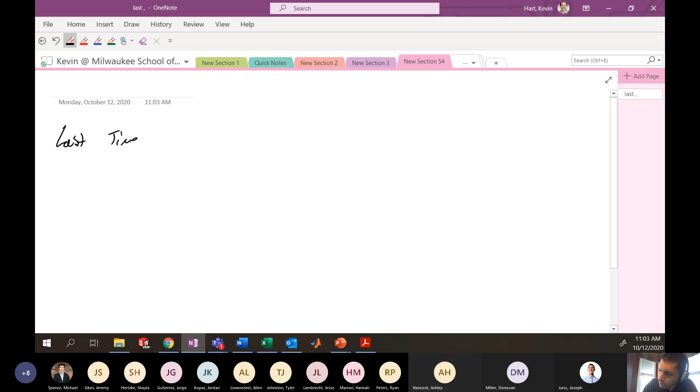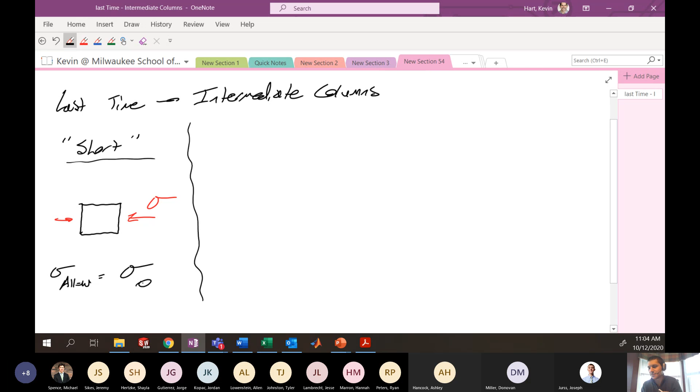So last time we talked about intermediate columns. The idea here is that you could think of columns in a variety of different categories, but if you thought about columns as short, then you might have something that looks like this. And if you're loading it axially with some stress sigma, then the allowable stress you might consider is just the yield stress sigma 0, if a bar is particularly short - this would be for small slenderness ratios.

On the other extreme, you might think of a long bar, like a long column. That might look something like this, where we load here with some stress. And our allowable load here at failure is that of buckling, which we call sigma critical, our buckling stress to failure. We saw that this was pi squared E over the slenderness ratio, which is L on R squared.

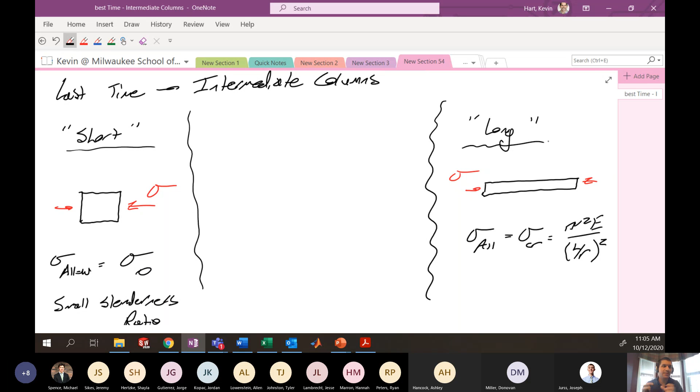Then the question I posed in the lecture last time is: what happens if you have something in the middle? What do we consider long? What do we consider short? And how do we delineate a long column versus a short column? So here we have what we call the intermediate range.

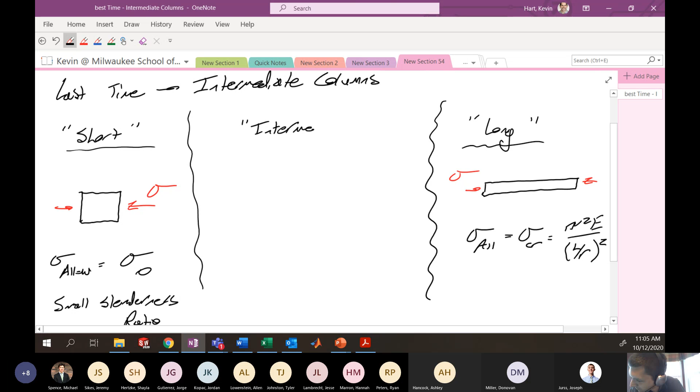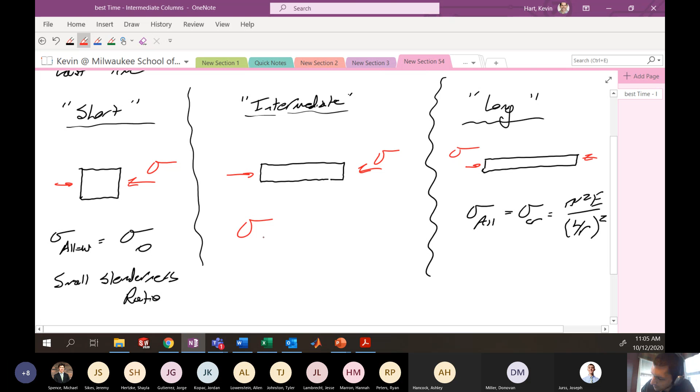The idea here is that maybe it's somewhere in the middle, in between. We're going to load this with some stress here, just like the other two situations. The question is, what is the allowable stress? Is it the yield stress? Is it the buckling stress? Is it something else? That's what we tackled last time.

So this is sort of this intermediate slenderness ratio idea. Here this is large slenderness. If it's very, very slender, it's going to just buckle like we've talked about before. And this is sort of middle slenderness.

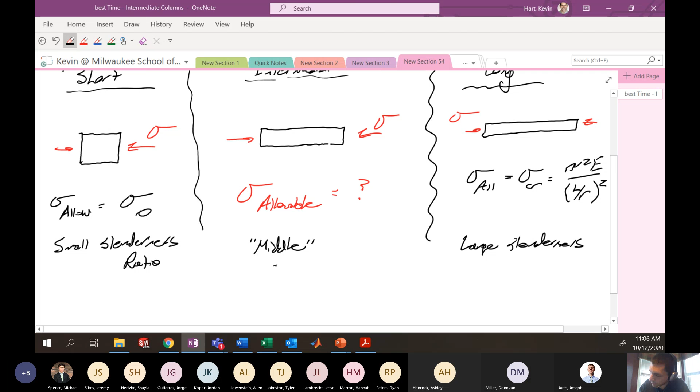Kind of how I feel after eating too many pizzas these days.

Middle slenderness. Okay, so the idea is you might want to plot slenderness ratio and look at what the stress at failure is given various slenderness ratios. If the slenderness ratio is very small, then you're going to fail by yielding. If the slenderness ratio is very large, you're going to fail by this buckling we've talked about before. And if it's in the middle, what happens? Well, let's talk about that.

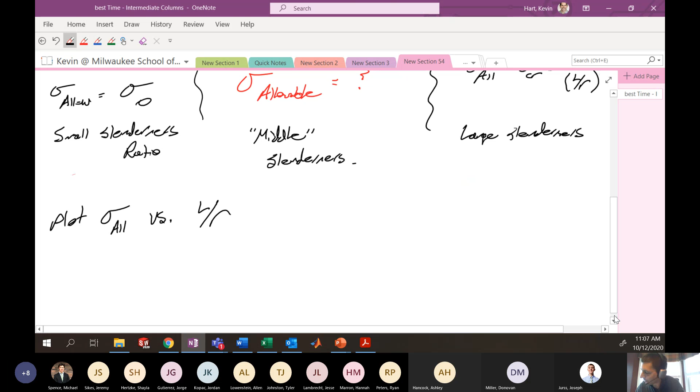So if we plot your allowable stress, we might call it sigma allowable versus slenderness ratio, just like L on R. Then you might see something that looks like this, where you have the slenderness ratio L over R on the x-axis, and you have the allowable stress on the y-axis.

Now we know at very small slenderness ratios, we just have these short blocks that are going to fail by your typical yielding, which you traditionally think of as the yield stress of the material. So here we have the yield stress sigma 0. This might be like the failure line that dictates failure for small slenderness ratios.

You might also have a situation where your slenderness ratio is very large and you're going to fail by this Eulerian buckling theory, that has some sort of curve that looks a little bit like this, where we know the equation that dictates this is pi squared E over the slenderness ratio L on R squared. So we see that this particular line has like a 1 over x squared sort of look to it.

So in an ideal world, your dictation of how these particular materials would fail can be governed by the slenderness ratio, by looking at what would be the minimum stress to failure in each one of these situations. And this would be the ideal case. Let's call it the ideal fail line.

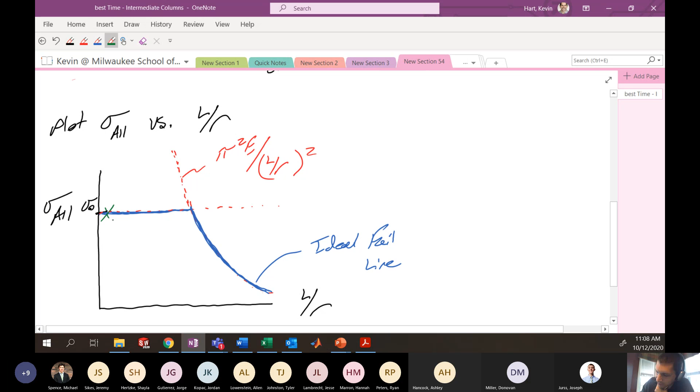But in reality, people have done experiments where they've looked at testing columns of various lengths, and you see that in reality, data actually looks something more like this. If we wanted to put a trend line to this, it would look something a little bit more like that. Okay, so this is reality.

It's the next reality TV show. Intermediate buckling.

So we see on the far left, where the slenderness ratios are small, we do sort of adhere to that very short slenderness, or this compression block range. So we would call this the compression range. This area down here is the compression range.

And then way out here on the right-hand side, where reality again lines up with our Eulerian buckling theory, we say that this is the Eulerian range or the slender range. But all these slenderness ratios that exist in this range here, where the data in reality doesn't actually line up with what you might predict, we would call this the intermediate range. And that's the interesting range for us.

So this is all still kind of review from last lecture. This intermediate range here varies by material.

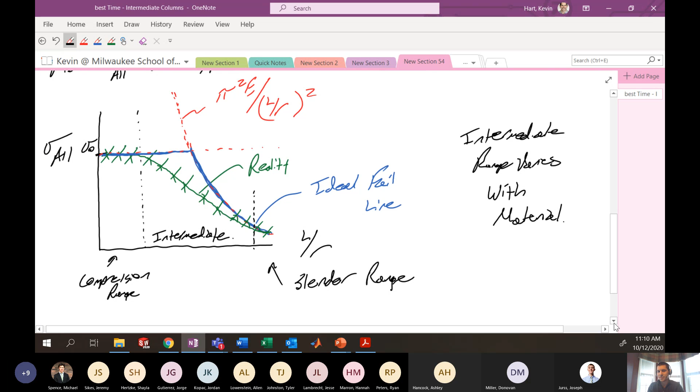So some examples I pulled up from the lecture last time. If you watched the video, you saw me pull in some examples of actual failure curves for a variety of different materials. I'll go through maybe one or two right now so you see.

Here is an example of one for aluminum.

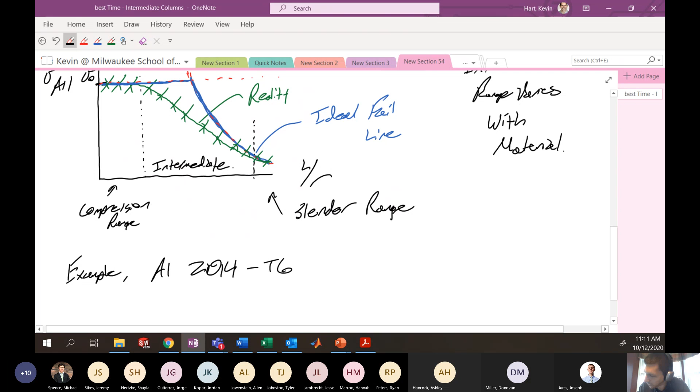So here's an example. This is aluminum 2014. Boy, I wish I could go back to 2014. No, I don't, because I'd still be in grad school and not enjoying my life as much.

All right, so here's an example for aluminum 2014 T6. Whoa, why did you go there? Go here. What? All right, let's just put them over here. There, okay.

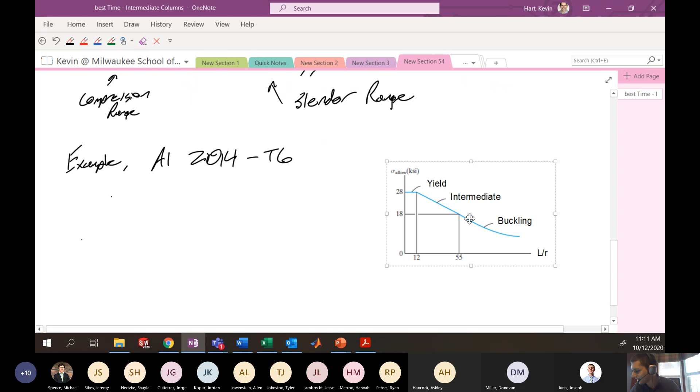So there's an example for aluminum 2014 temper 6. The idea is that down at this end, where your slenderness ratio is 12 or less, you're going to have this yielding, short block kind of compression type failure. If your slenderness ratio is greater than 55, you're going to have slender buckling, which is pi squared E over L over R squared, your typical Eulerian buckling equation. Then you have this intermediate range here that doesn't really follow either one of those particular lines.

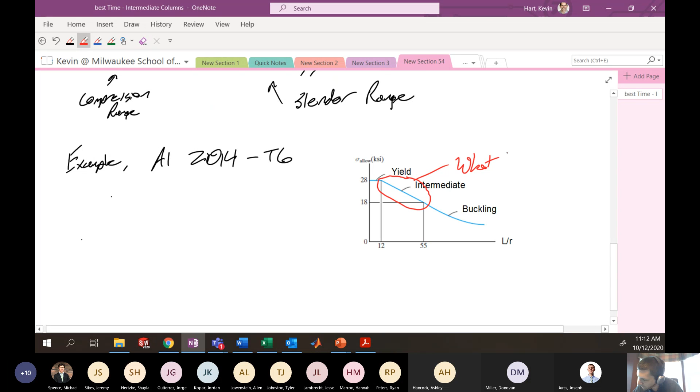And so there's this trend line that exists, that people have come up with utilizing real data, that we now use as sort of gospel for this particular material. Again, this is specific for aluminum 2014 T6. They vary by material. So the question is, what is the equation that governs this particular portion of the curve? What is the equation that governs that line?

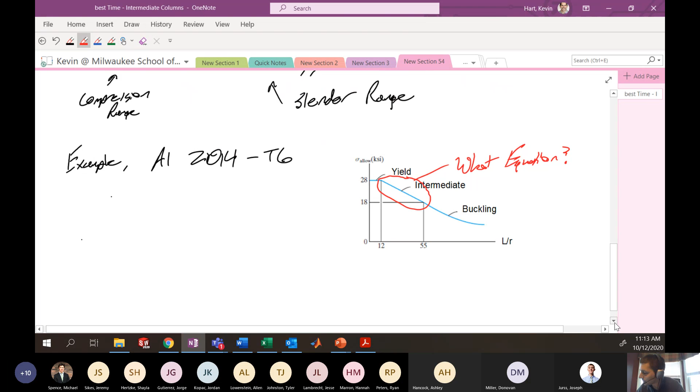Depending on the material you're looking at, the equation that governs that line is going to be different. So you more or less have to populate a chart that tells you all of the equations for all of the materials. Your Riley book has an example of a couple of probably the most relevant materials, and I'll go through that here now. This comes from your book - this is table 9-1.

If you take a look at this chart, it shows 4 materials of interest, even though there are many, many more codes like this that exist. So let's take a look at this first one, code number 1. This is for a structural steel with yield point sigma Y - whatever structural steel you want to consider.

In this situation, we have your typical Eulerian looking equation if you're very slender. So the slender range is on the right-hand side. This tells us that if you're slender, your equation for failure is governed by this particular expression: pi squared E over 1.92 times slenderness ratio squared. Kind of a strange expression, but that's what it is.

We're dictating where the slenderness range is by this particular domain distinction. Here we're saying that if L over R is greater than this C value, you're in the slender range. So what is that C value? Well, that C value depends on the yield strength of your material - I'll blow this up a little bit, but this here is 2 pi squared E over sigma yield. This is a distinction telling you what is the actual slenderness ratio for moving from the intermediate to the slender range - this governing value. It's an indication of what you might need to use to determine whether you're slender or intermediate.

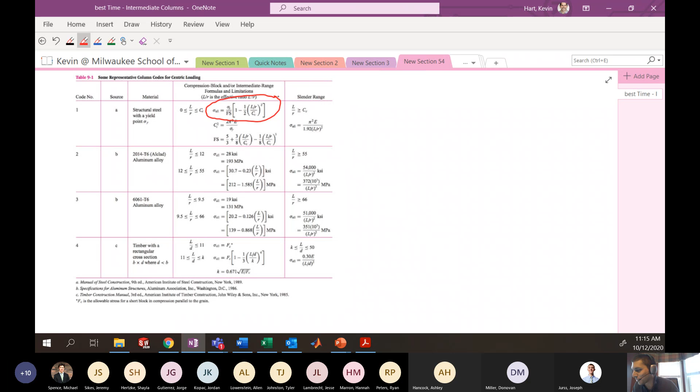Now, if you're less than that C value - so if you're between 0 and that critical value given by capital C - you're going to use this equation here. That's this crazy equation that dictates the intermediate range for this particular material: sigma y over Fs, multiplied by 1 minus 1/2 times slenderness ratio divided by C squared. It's this kind of crazy equation where Fs is given by this particular expression. A lot of randomness to these equations, but if you just follow this chart, it can get you where you need to go.

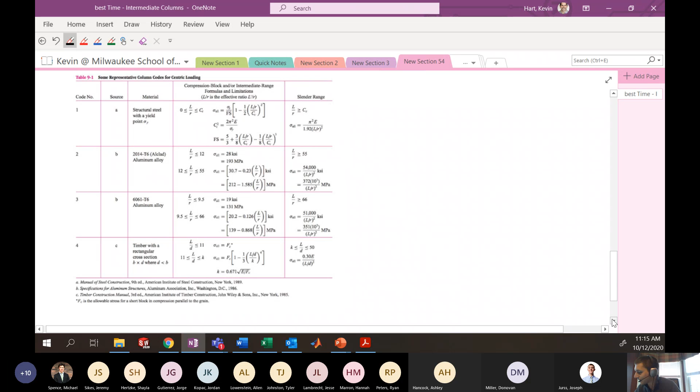So that's about where we left off last lecture. I just wanted to do a quick recap in case someone hadn't watched it, and we'll do now an example problem where we're actually going to use this chart to figure out a problem.

So here's an example from your lecture notes. I'll pull this up quickly for you to copy down, and we're going to look at a Douglas fir timber column. Douglas fir is a common material used in housing construction, and we'll look at this particular situation where we're loading up a long, slender timber column.

Tinder column - gosh, let's swipe right on our Tinder column. Okay, no, timber column, and we'll take a look at how this guy fails.

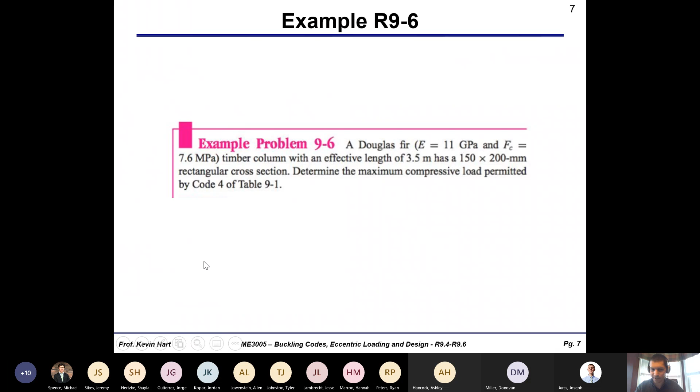But here's the problem we're going to work on. We're given the modulus of the material, and we're given this FC value, which is the maximum compression load required to work in Table 9-1 that we have before. It has an effective length of 3.5 meters. Effective length means it's already accounting for the boundary conditions, so we don't really have to worry about boundary conditions here. We're told the effective length is 3.5 meters, and we're told some information about the cross section. Let's draw this cross section quickly so we get an idea of what we're working with.

So this cross section maybe looks something like this. This guy is 150 by 200 millimeters. So maybe we'll call this 150 millimeters, and this is 200 millimeters. We want to determine the maximum compressive load permitted by this particular code.

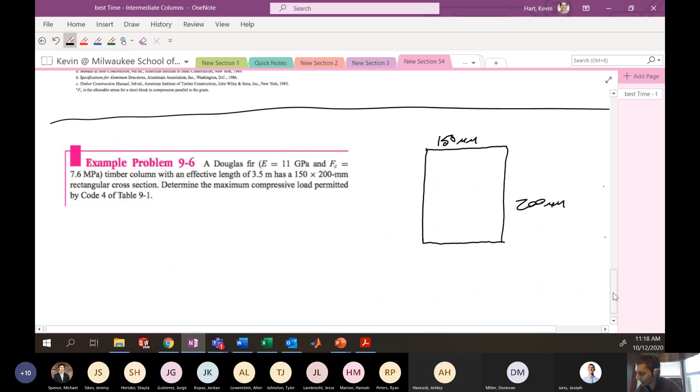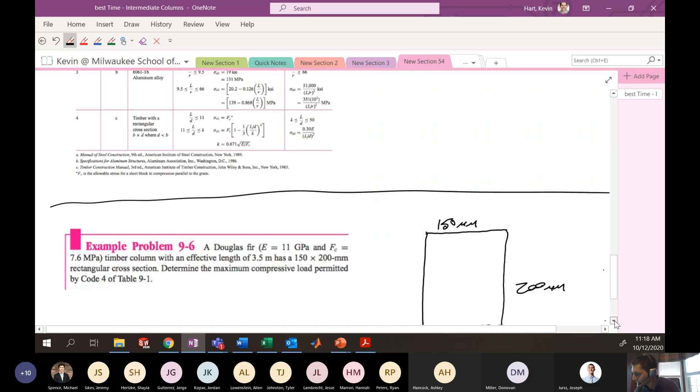All right, so we want to take a look at this code first, and we're specifically looking at Douglas fir. Let's go back up to this chart here, and we'll take a look at the Douglas fir portion. Maybe I'll bring in my PowerPoint slides so we can zoom in on that area. Let's bring in the notes here. By the way, this table, if you didn't notice, was in your notes.

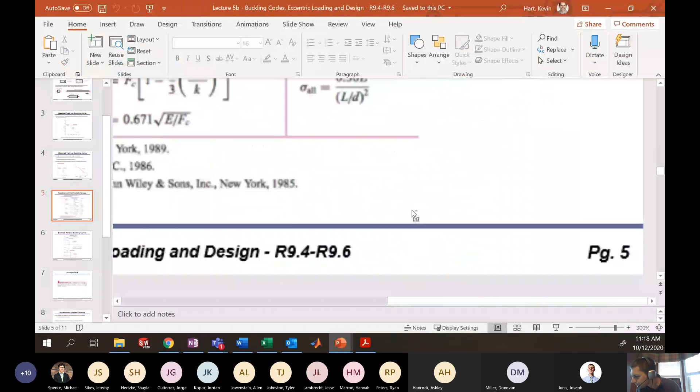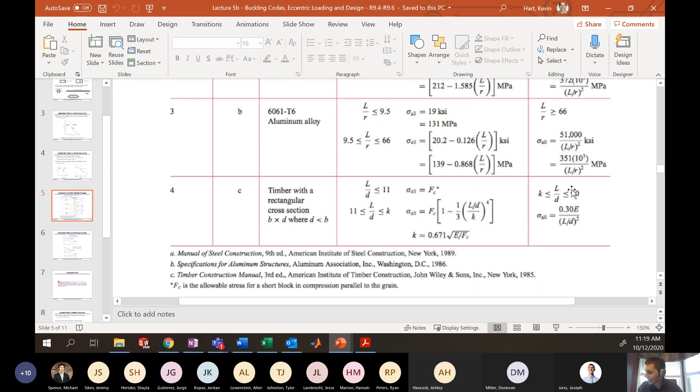And let's take a look at this guy here, specifically the Douglas fir portion, down at the bottom. So we have a timber with a rectangular cross section B by D, where D is less than B. This will be important in just a second. We have information here about how we distinguish the various regions. If L on D is less than 11, the allowable stress is just this FC value. If we're between 11 and K, our allowable stress is dictated by this equation, where K is calculated with this particular value. And if we're between K and 50, our allowable stress is given by this other equation. So let's go back over to our problem statement here.

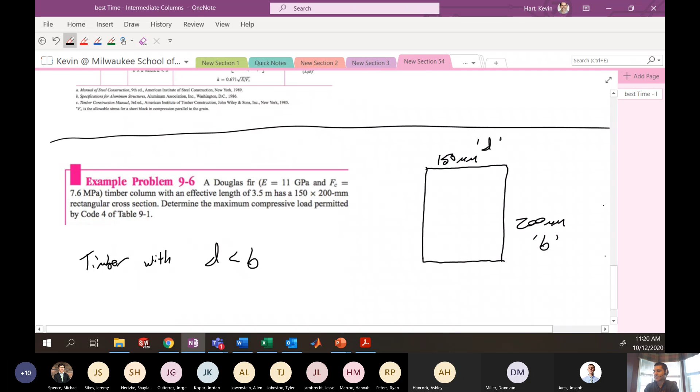We're told that the timber has a rectangular cross-section B by D, where D is greater than B... sorry, B greater than D. So here, this 200 millimeters would be our B variable, and this 150 millimeters would be our D variable. Hopefully we understand that, because D has to be less than B in a rectangular cross-section.

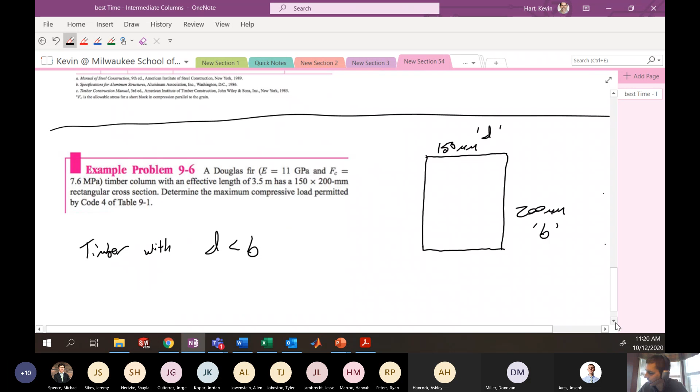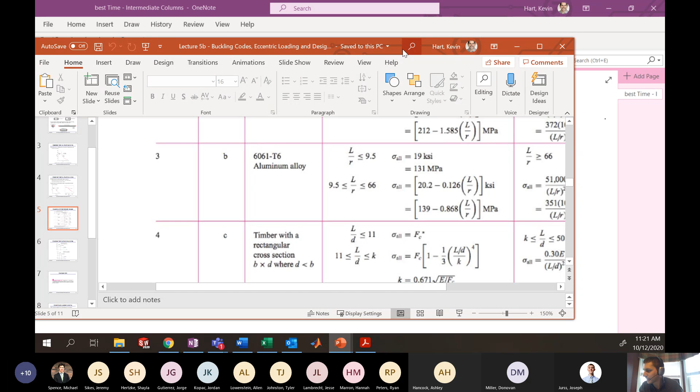All right, so with that chart, we saw that if our effective length over D—remember, we're working with D for this particular chart, the one side length of the cross-section B by D—is less than or equal to 11, we fail by compressive stress, and the allowable stress is just this FC value.

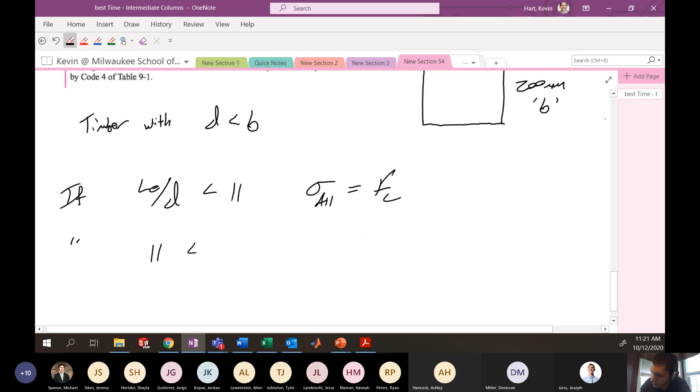If LE on D is between 11 and K, then our allowable stress is given by this other kind of crazy equation—I won't write it down here, but we'll revisit it later. And if K is less than or equal to LE on D, which is less than or equal to 50, also part of the chart, then your allowable stress is given by yet another equation in that chart.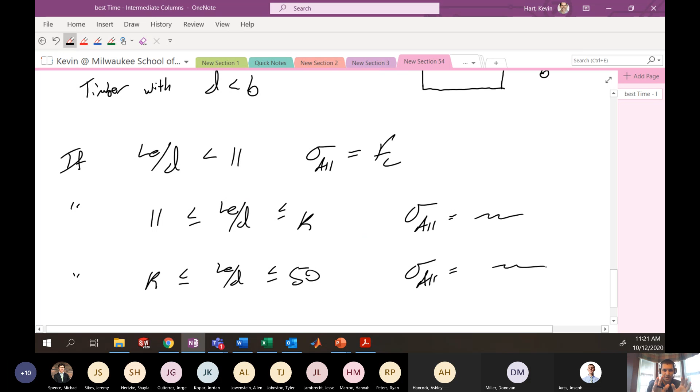So to work this problem, we're going to need to calculate this L on D value, and we also need to calculate this K value so we know how to delineate between the intermediate and the slender regions. So let's get on with that.

So here, L on D: we're told the effective length of this column is 3.5 meters. So here's 3.5 meters divided by the variable D, which is the shorter portion of the cross section—0.15 meters. I'm going to work in meters instead of millimeters. This gives me an effective length ratio I need for this problem, which is 23.3.

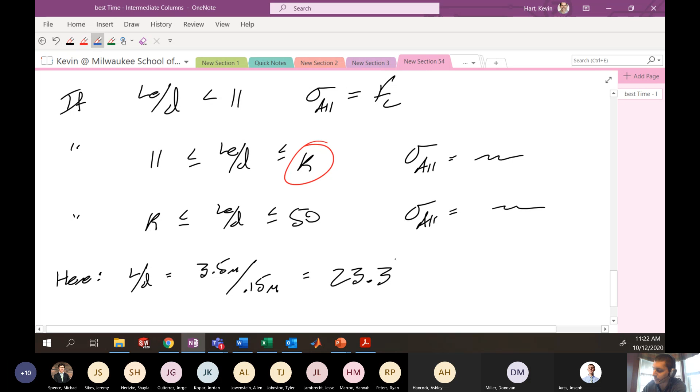So if the value here is 23.3, it either falls in this category or this category, and which category it falls in depends on my calculation of that variable K. The 23.3 is kind of my slenderness ratio for this particular problem. All right, so now we need K.

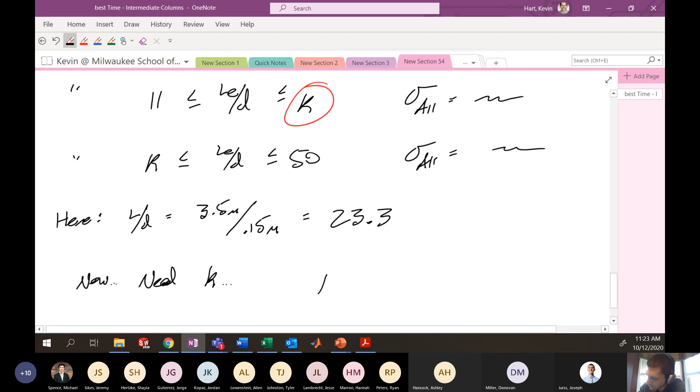If we go back to this particular chart, it tells us how to calculate this value of K. It's roughly 0.671 times the square root of E divided by the failure strength. Let's use that.

This is the square root of the modulus, which is 11 GPa given in the problem, divided by the failure strength of this material, also given in the problem, 7.6 MPa. Don't forget your units are mismatched, so make sure you're in the appropriate power of 10. If you work this out, you get a unitless value for K of 25.5.

So if K is 25.5, and in this example we have this pseudo slenderness ratio of 23.3, you can see we fall into this range here, which is actually the intermediate range.

So with that, now we have to revisit our table and look at what the actual equation is that governs failure in that range.

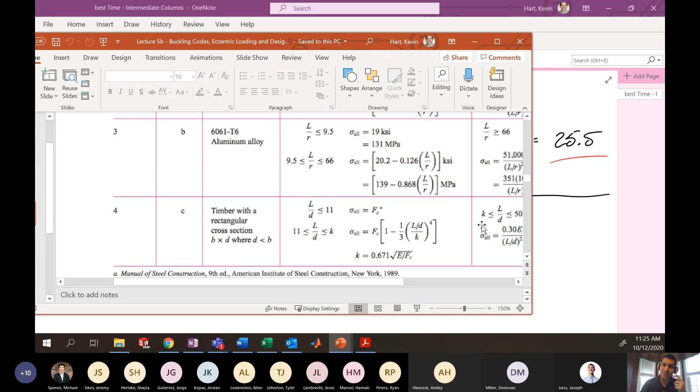Back to table 9-1, if you look into this table, you'll see this tells us that if we're between 11 and the value K, which we are, the allowable stress is FC times the quantity 1 minus 1/3 the pseudo slenderness ratio divided by K, to the 4th power. A strange looking equation, but that's what people established with experiment. It's a semi-empirical method.

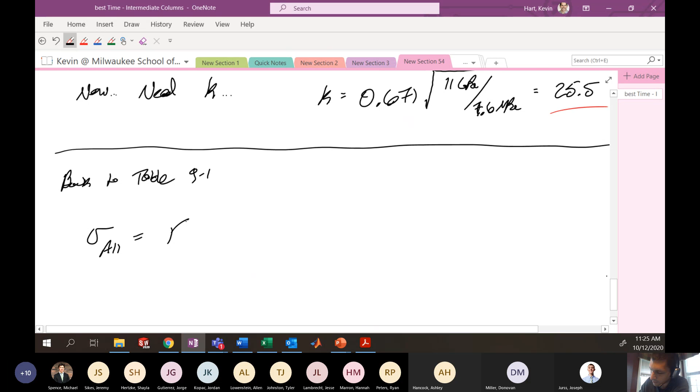So then we have this allowable stress for failure: FC times 1 minus 1/3 of our pseudo slenderness ratio L over D, divided by this capital K, all to the 4th power. This is our allowable stress.

We have all these numbers already, so we can just plug it in. Our allowable stress for failure is 7.6 MPa multiplied by 1 minus 1/3 times the quantity L over D, which we calculated above as 23.3, divided by the value K, which we calculated as 25.5, all to the 4th power.

If we work this out, the allowable stress in this particular case is 5.83 MPa.

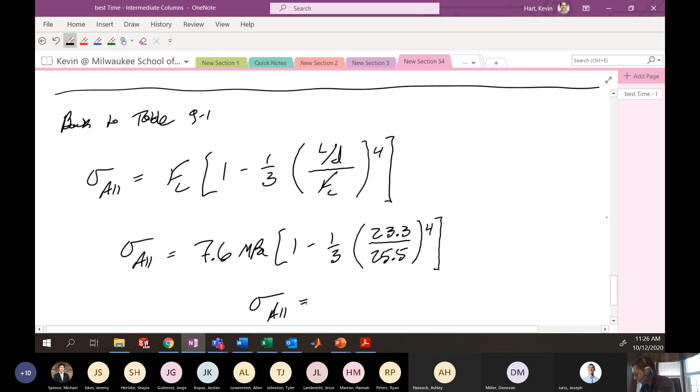So that's the total stress that this particular column can handle, given its slenderness ratio and other geometric properties like the dimensions of the cross-section and the length of the piece.

The problem actually asks us for the maximum load it can handle, so we need to transfer this allowable stress into an allowable load.

To do that, we simply multiply the stress by the cross-sectional area to get our allowable load.

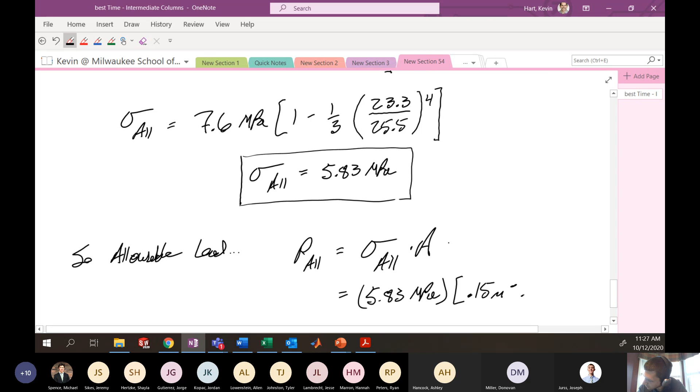So that here is going to be 5.83 MPa multiplied by the cross-sectional area, which is 0.15 meters times 0.20 meters, or 150 by 200 millimeters. If you work this out, you'll get that the allowable load in this particular problem is 175 kilonewtons.

So that's kind of how you use the chart to get through some of these problems.

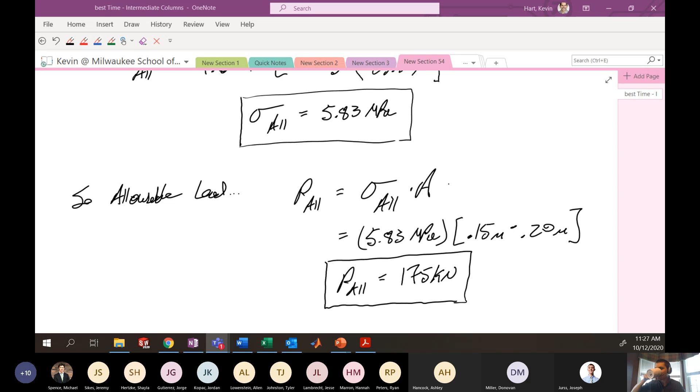Okay, let's continue with the last complicated topic for buckling. I'll say this next topic is probably the one that confuses people the most in this entire class: eccentric loading of columns that could potentially buckle. Complicated, all right.

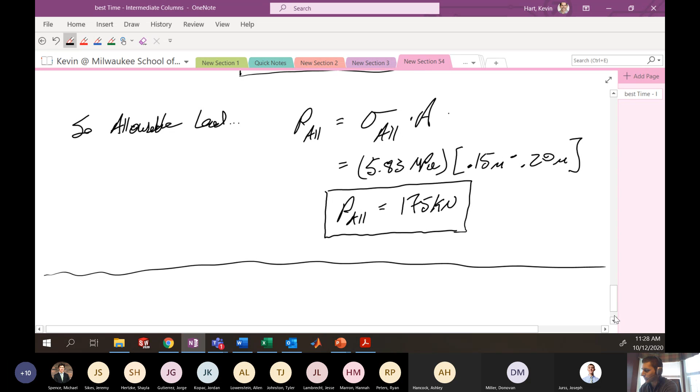Everything we've talked about so far has been for central loading, so let's remind you what that means.

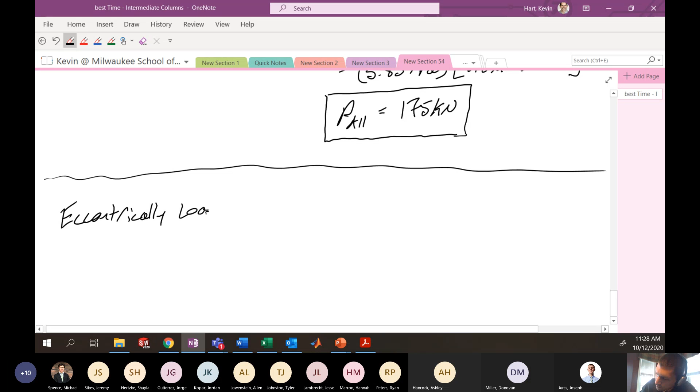The topic here is eccentrically loaded columns. Eccentric, like my personality, right? Right.

So if we have some rectangular cross-section that looks like this, it may be long and slender and possibly going to buckle. Everything we've talked about so far has assumed that the load we put on that column acts right in the center of that cross-section. If we have the center of this cross-section here at 0,0, we've assumed that our loading situation is right down the center, which here is some value P, and we'll say that this is a centric load.

Centric or central load is different from a load that is not acting directly in the center. That load could be anywhere in that cross section, or it could be displaced off of that cross section if you have some way to load it with some additional moment arm.

So an example of an eccentric load might be right here, at this particular point. Let's say here is some load P, which is eccentric, and that's just hanging out there in space. Let's not call it P, let's call it Q.

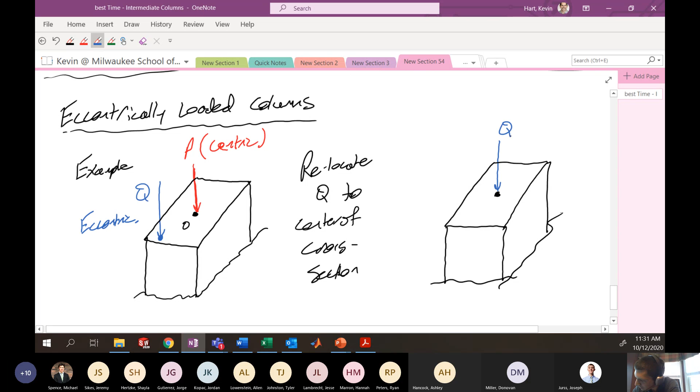If you do that, you're still going to have that load Q that hits here, but now you're going to have bending moments which are created by relocating Q. So if we think about the bending moments created by relocating Q, we might have a bending moment in this direction made by the moment arm that moves here, this distance there.

But we also may have the moment arm that is this distance here, which might also create for us a moment in this general direction. So we could have moments that act on this particular cross section as a result of relocating that Q to the center of the cross section.

We know about this from combined loading. Because of this, you end up with additional stress on the cross section that you might not have considered if Q was a centric load. If Q is a centric load, this contributes stress in the form of P on A. But those bending moments now also contribute stress on this cross section in the form of My over I.

And same thing with this guy, he's going to contribute stress in the form of My over I. So you have to be mindful and know that if you relocate this force to the center of the cross section and generate these moments, they're going to induce additional stresses in the cross section with that linear load or stress distribution through the cross section. You have to be able to accommodate that and account for that.

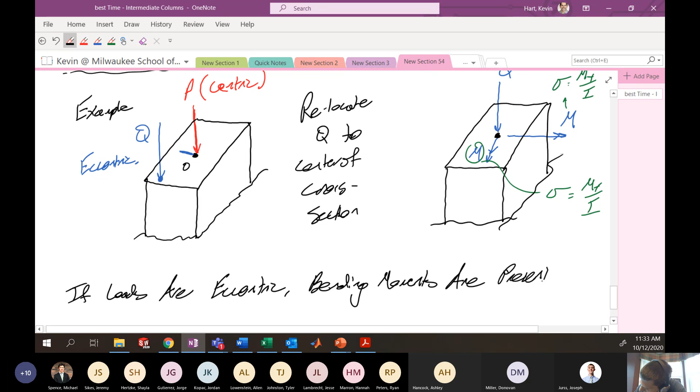Here's the general point: if loads are eccentric, bending moments are present. You're going to have these bending moments present, and they're going to contribute additional amounts of compressive stress.

If you think about a bending moment, one side's going to give you tension, one side of the cross section is going to be in high levels of compression. So if you thought about this bending moment here, it would induce high levels of compression along this side of the bar, and high levels of tension on this side of the bar. Now this bending moment might induce high levels of compression on this side of the bar and high levels of tension on this side of the bar.

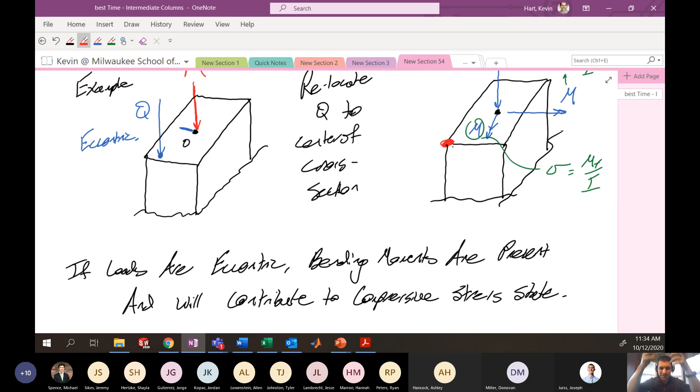So if I was considering where the compression is greatest in this cross section, it's probably going to be greatest at that particular point where I have compressive stresses acting from these bending moments maximized at that location. That would be where the cross section is most likely to first fail because that's where the compressive stress is highest, at that particular point.

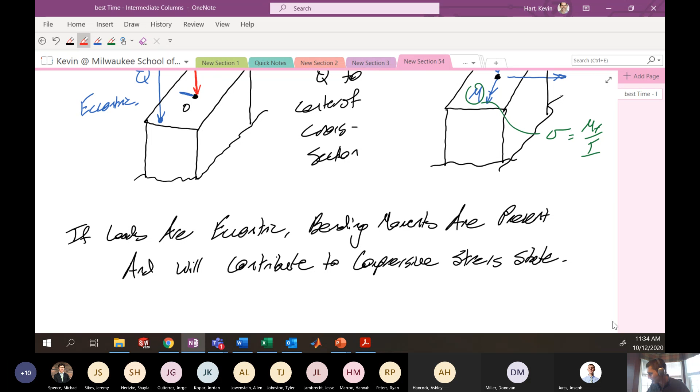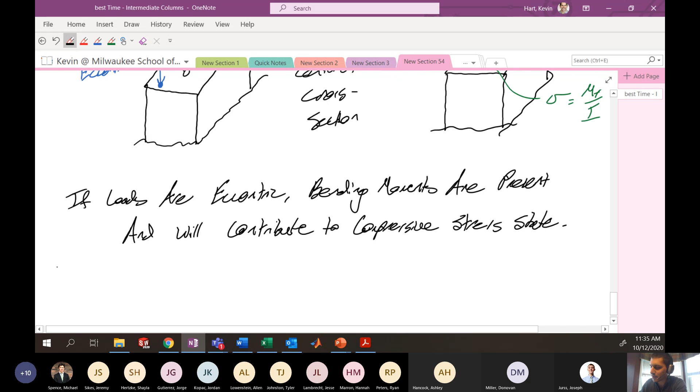So my point in all this is that you need to account for this eccentric loading and how it contributes to the compressive stress. Generally the idea is that you want to attack this eccentric load the same way you attack the combined loading problems. So let's go through the methodology of attack. This methodology has a name: it's called the allowable stress method.

When you have an eccentric load, the current state of stress on the bar is going to be some combination of the axial load plus the bending load. So with eccentric loads,

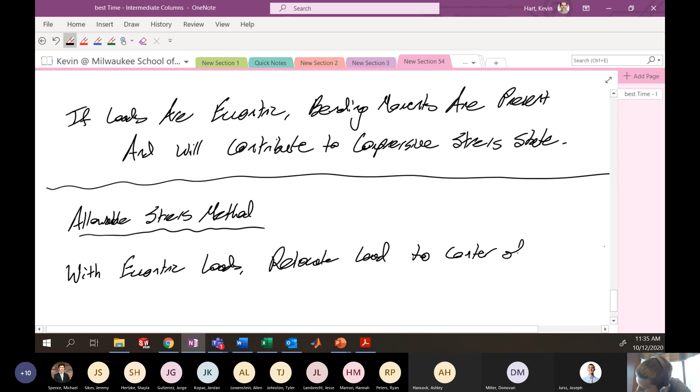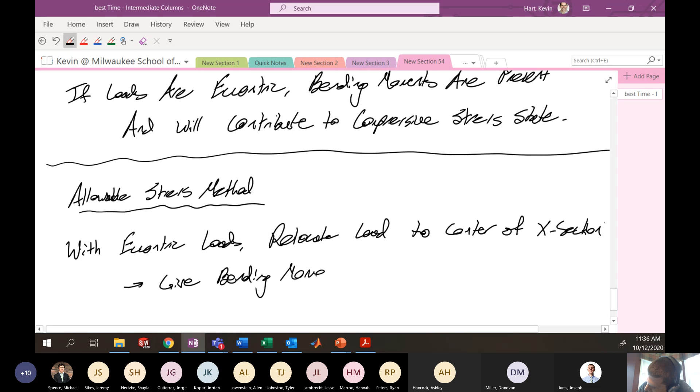we're going to relocate the load to the center of the cross section, and this will give bending moments. Then you want to find what is the maximum compressive stress in the cross section.

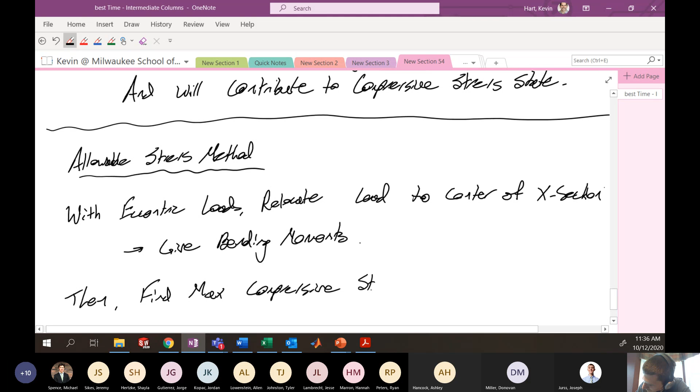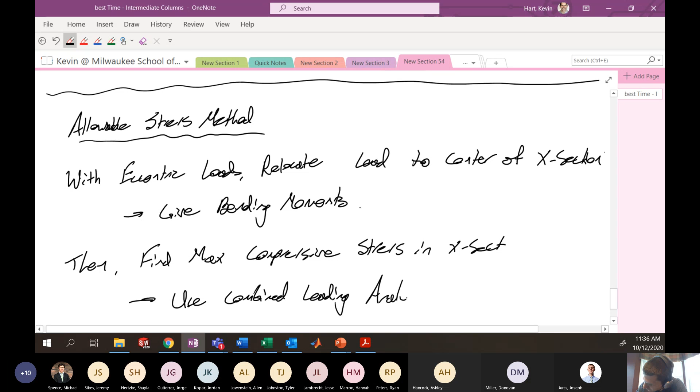And for that, you're going to use your combined loading analysis. That stress state that currently exists in the cross section from these eccentric loads, we'd label this as sigma current. So the current stress state is equal to the axial load P on A, plus some bending moment generated from relocating that force to the center of the cross section.

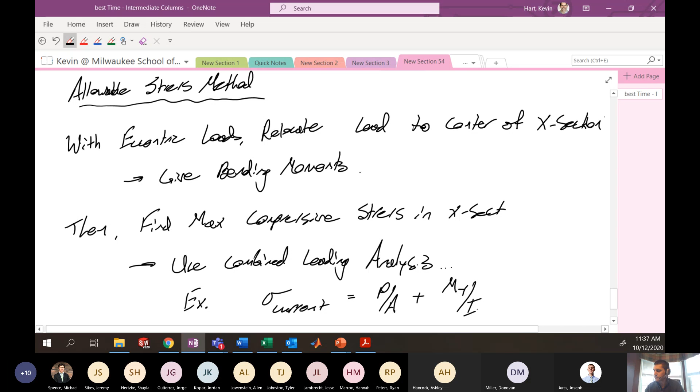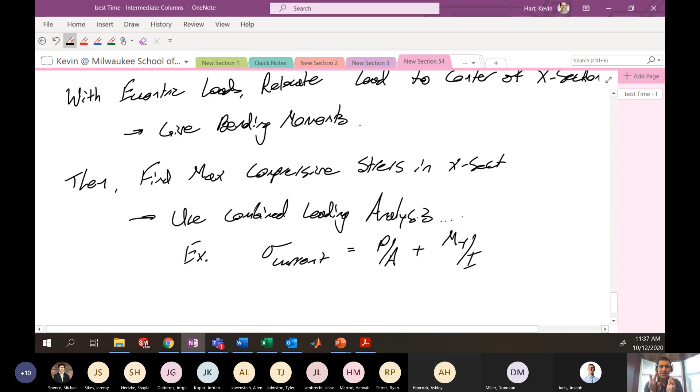Once you've calculated the maximum compressive stress on the cross section using this analysis, you want to compare that stress to the stress on the cross section that would cause failure. This is where the confusion usually occurs.

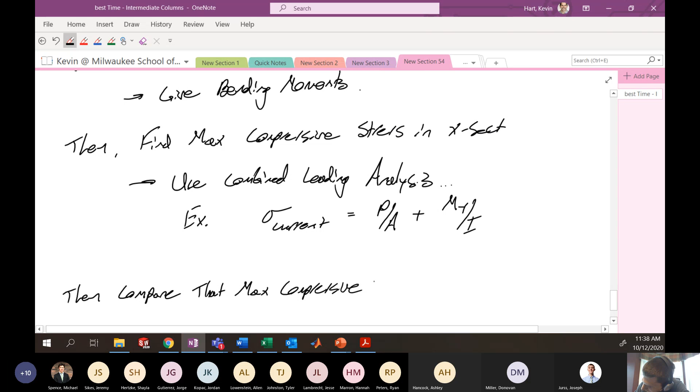Compare that max compressive stress to the maximum allowable stress in the cross section, as given by table 9-1. That maximum stress is this allowable stress, okay?

What I'm about to say now is probably the most important thing I'll say all lecture. You have to calculate the allowable stress and the current state of stress separately, okay? Very important, three stars. Must calculate the current state of stress and the allowable state of stress separately.

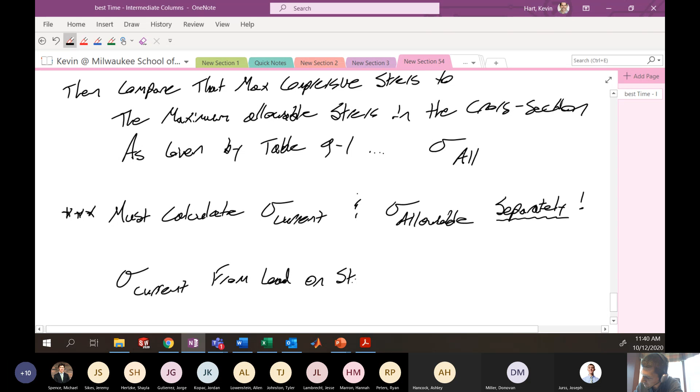The current state of stress comes only from the load that's on the structure and the geometry of the structure—from load on structure. So in an example, sigma current is P on A plus My over I. That is the current state of stress on the cross-section.

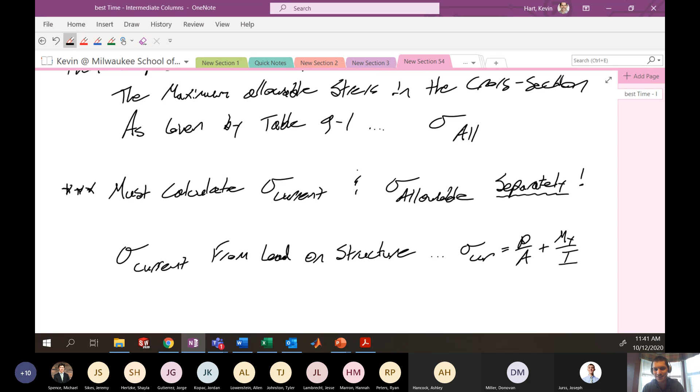It has nothing to do with the amount of load that would cause buckling failure. It has nothing to do with the yield stress. It has nothing to do with failure criteria in any way. It is just what is the load and the stress on the structure? What is the maximum compressive stress on the structure right now? It has nothing to do with table 9-1, nothing to do with yield stress, etc.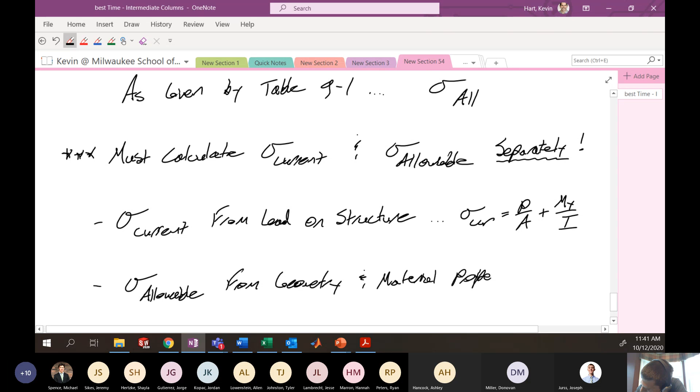Contrast that with the allowable stress. This is from geometry and material properties, and this is more or less from table 9-1. The allowable stress has nothing to do with the current loads that are on the structure, okay? The allowable stress is just the amount of stress on the cross-section that would cause it to fail by buckling or yielding or intermediate failure, all that sort of stuff we've talked about. It has nothing to do with the load that's on the structure.

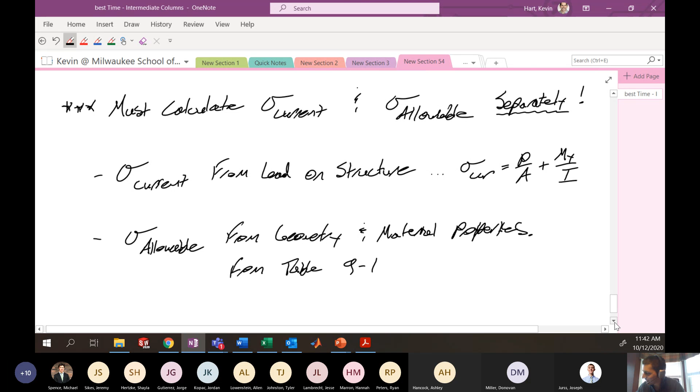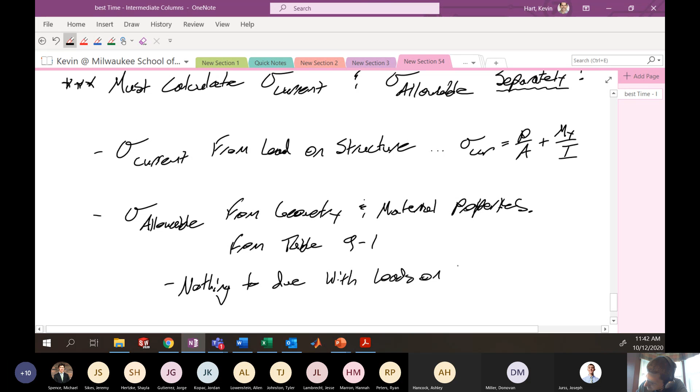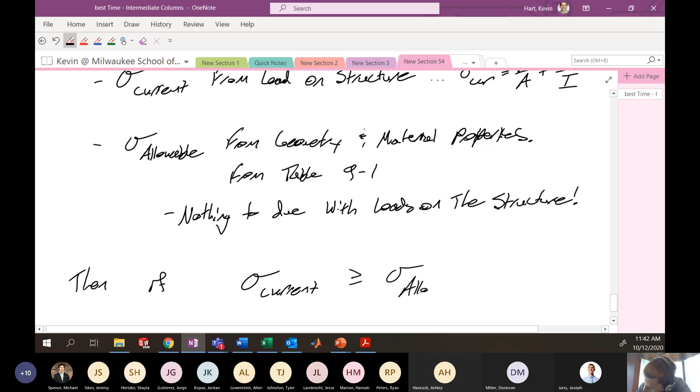Once you've calculated these two things, the allowable stress and the current state of stress, then if the current state of stress is greater than the allowable stress, you fail.

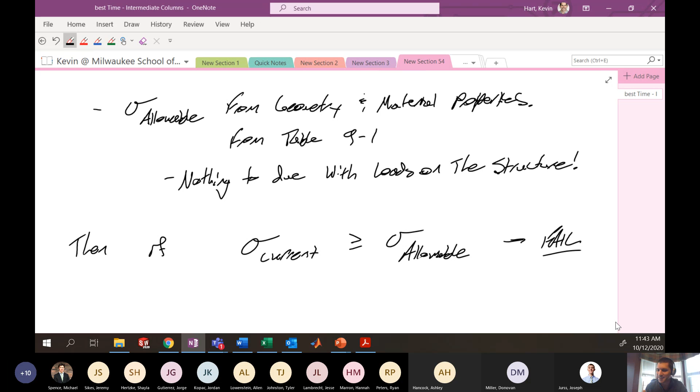Oh my goodness, calculate these things separately. Oh my gosh, okay? I say this a thousand times—I always say it a thousand times every quarter that I teach this class, and I cannot emphasize this enough. You have to calculate the allowable stress and the current state of stress separately. All right? Please, if you take nothing away from this lecture, take away that you have to calculate the allowable and the current state of stresses separately. Maybe you don't know how to do that, but at least you know to do that separately.

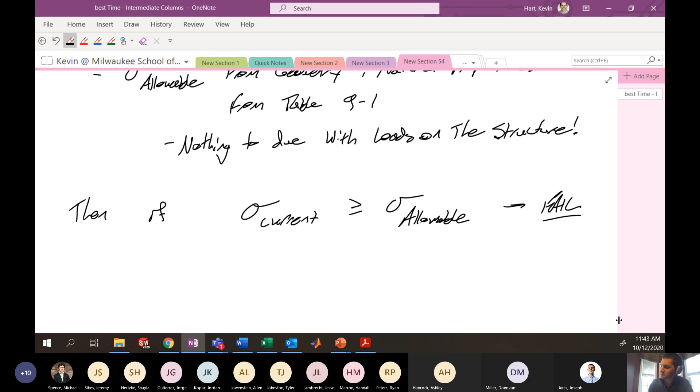All right, so let's look at an example problem where we're going through this whole process with an eccentric load.

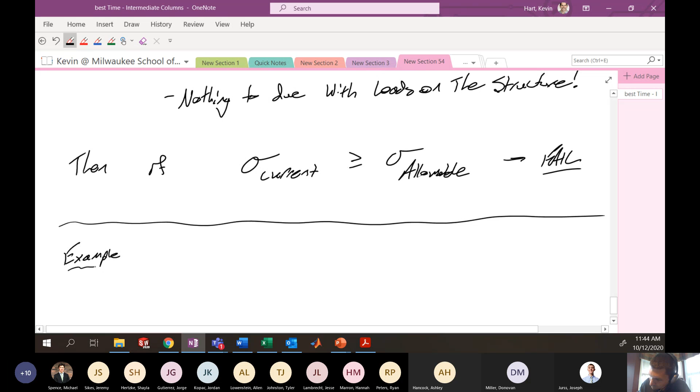I want to see if I can just copy this directly down. This is in the notes, so you can take a look at this if you want—it's right in the notes. I'll give you a second to copy this down, it's kind of a long problem statement. And we'll do this problem when we come back on Wednesday.

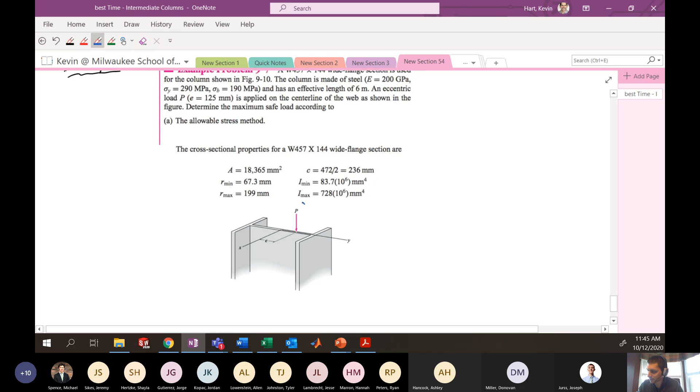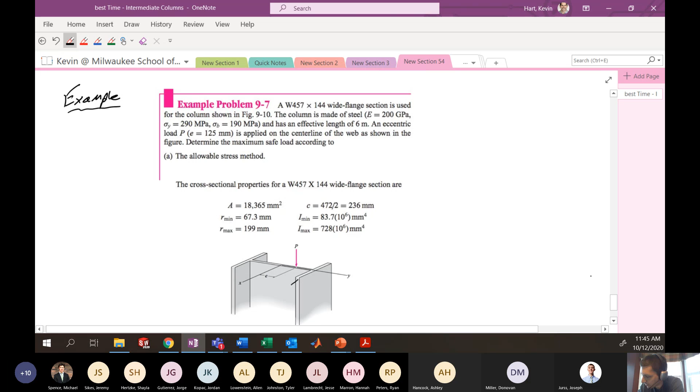But hopefully we kind of see this eccentric load here, this little value of little e here, giving us this load which is kind of off center. It's a little bit unclear from the picture too, but this dimension here is the dimension little c, which is given here.

Okay, we'll leave it here for now. I'll leave this up for a little while if you guys want to continue copying this problem down. And we're just going to jump in on Wednesday right into tackling this problem.